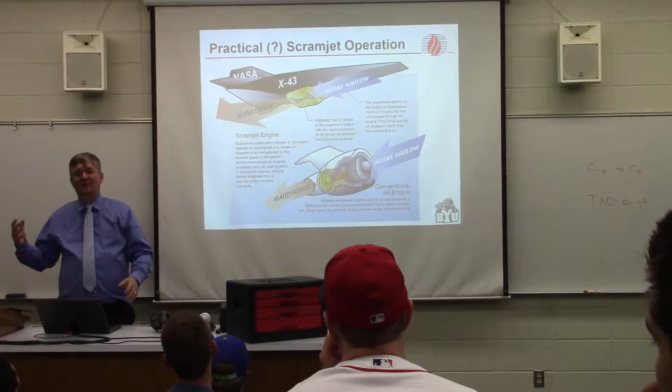The way they work is basically about the size of this room. It's just a big wedge, and underneath it is this engine. This is a scramjet, and they're introducing hydrogen in this engine, but they can't get the hydrogen all the way through. So this is what it looks like underneath. The gas is coming in through here, and they introduce the hydrogen here. But in reality, only about half of that hydrogen, or maybe a fourth of it, actually burns.

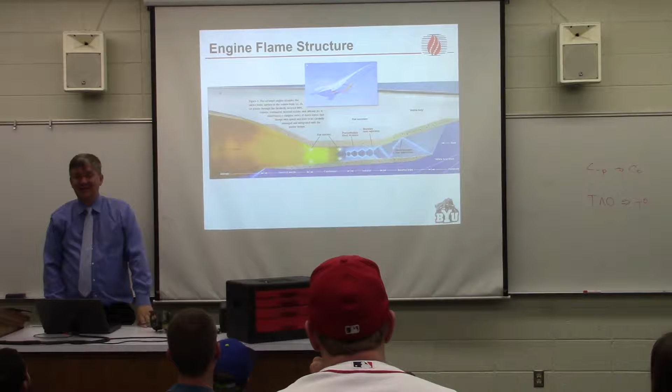Trying to keep this thing in flight is a major challenge, but they have accomplished some pretty significant things. This is what it looks like in flight. So it's flown at Mach 7 and 10 in 2004, and it's capable of getting up to about Mach 17 if they can get the system to work right.

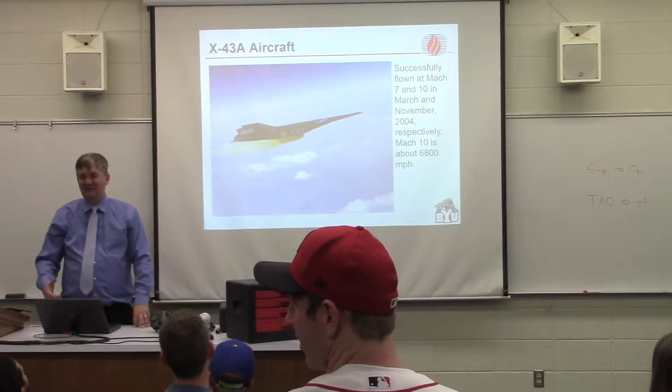So they're working along - this is part of what they think will be a space plane. You can get it up at a high enough velocity in the atmosphere that they can actually coast it into space, and at least in theory it will be a lot cheaper when you get to space than just the heavy lift rockets that we go through.

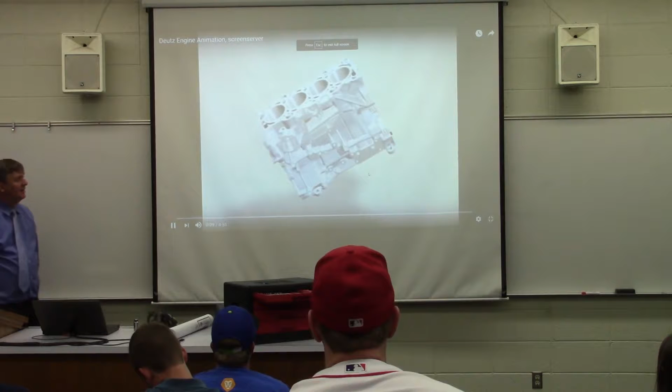I wanted to look at this. This shows an engine being put together. This is a Deutz engine, but it's really cool. So that's called the block, and that's the biggest, heaviest part of the engine.

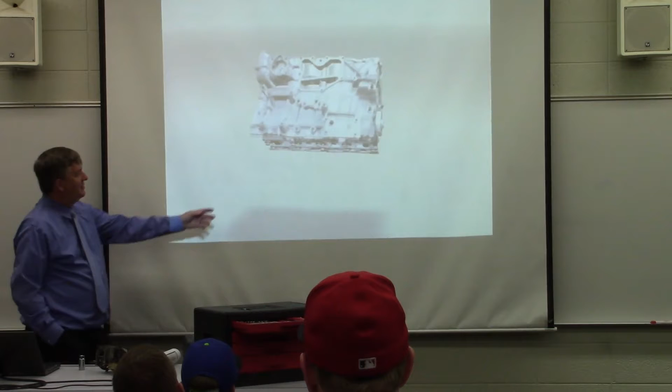That's the crankshaft for, in this case, a 4-cylinder engine. Coming onto those are the bearings, the connector rods, the pistons. The pistons are getting put on with their bearings. So there's the 4 pistons going into the 4 cylinders. They're in the block, and then this is the bearing for the crankshaft, and a few miscellaneous components.

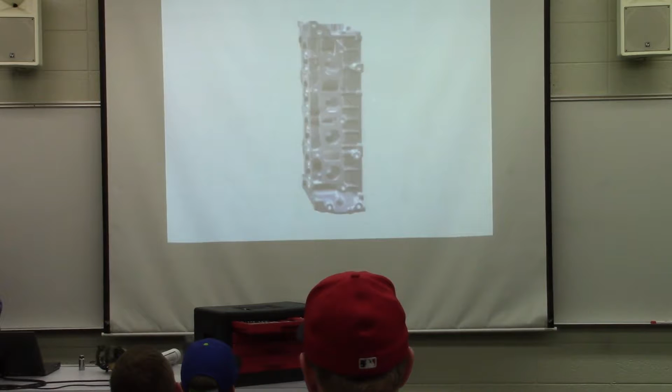That's actually the timing wheel, that goes on here, and this is the header. So this is what sits on top of the block where the valves and all of those things are. So that goes on, so first you have to load it up. There's the valves. Those are the fuel valves and the exhaust valves coming in.

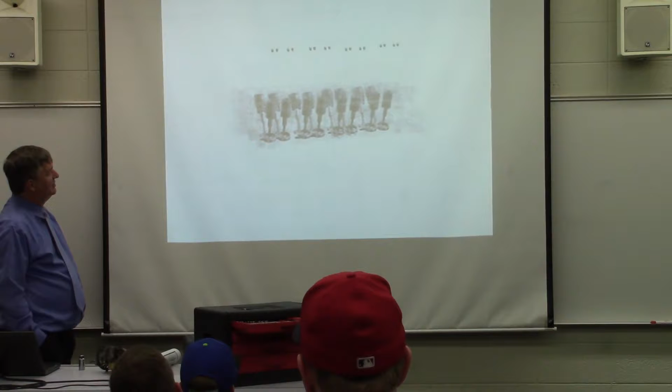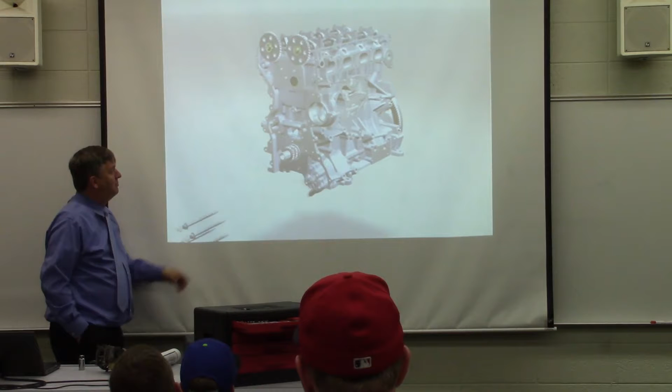So the valves are all installed. Valve covers, and then these are the camshafts that came up on the top of there. The camshafts get bolted down. You just saw that gasket come on. That's the head gasket that we talked about. And so the header gets bolted to the block. The head gaskets between those.

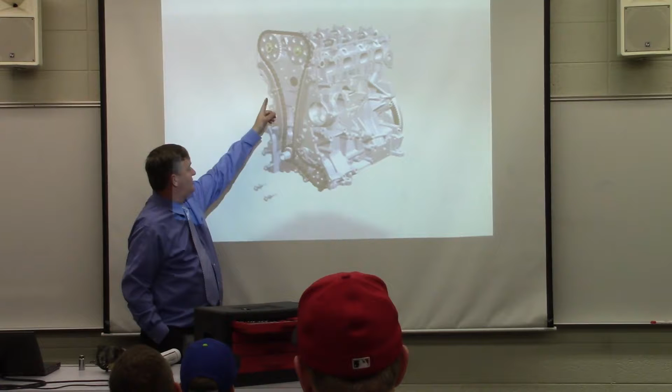And now come things like the water pump. Oh, the timing chain. Remind me to talk about that, that was the timing chain, that long one. That's important for you to understand as well.

And just some covers for those things. This is called the tappet cover. That goes over the very top. It also has a gasket, way less expensive gasket because there's no pressure in there to speak of. It just covers the top of the engine.

And this is the oil pan that goes on the bottom. Inside the oil pan is the oil pump. So you see them installing the oil pump there. And then that sits on the very bottom of the engine where the oil goes, and that gets bolted onto the bottom.

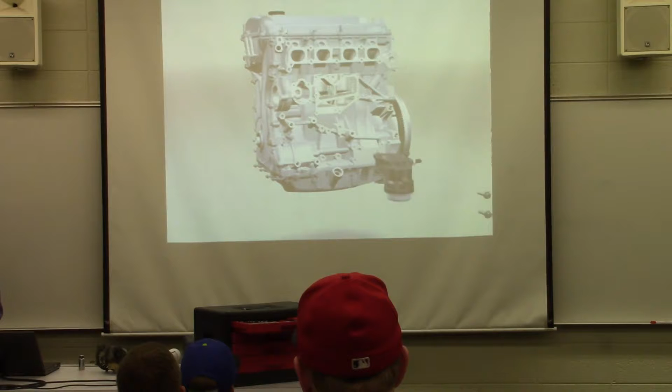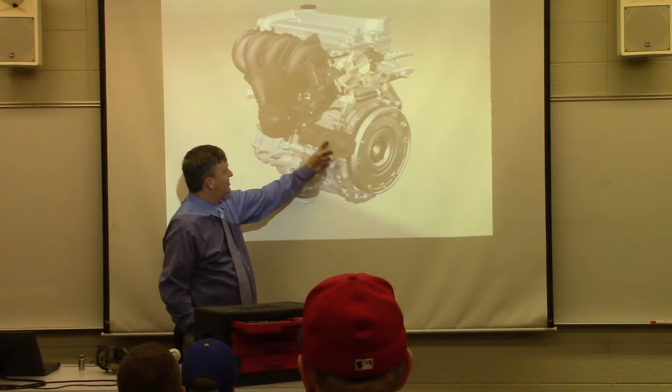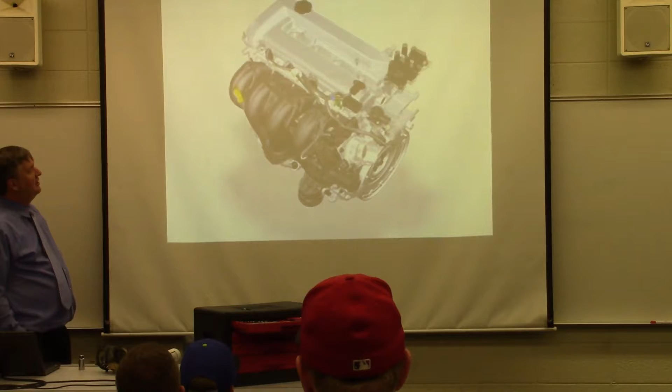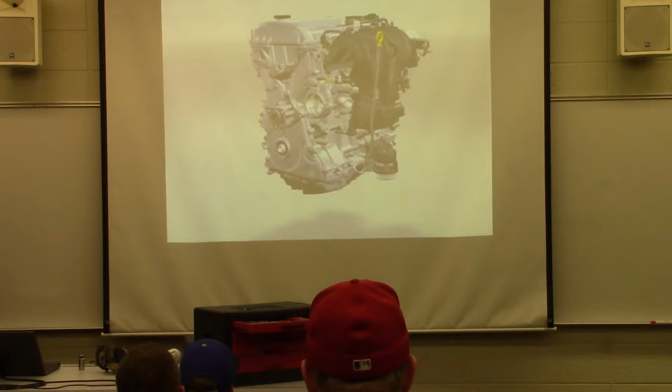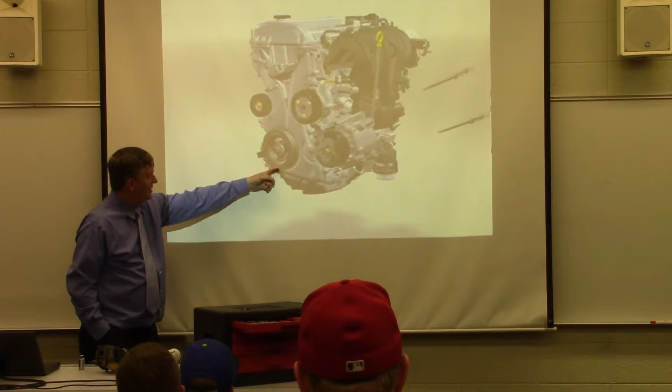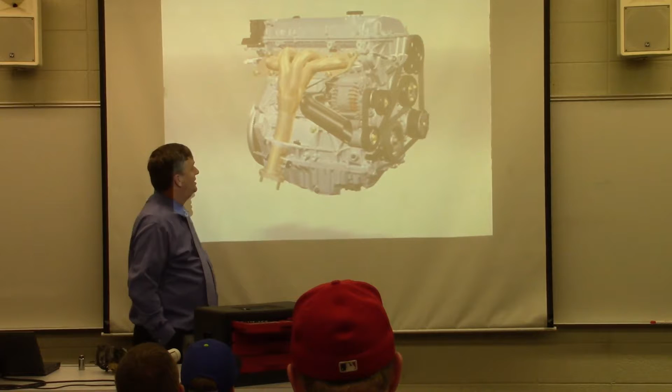Another idler arm, and then, oh, there's the alternator. The other one must have been the power steering. And then the fan belt, or serpentine belt is what they really call it these days, exhaust manifold, and you've got the engine built, just that fast. It takes a lot longer, it does.

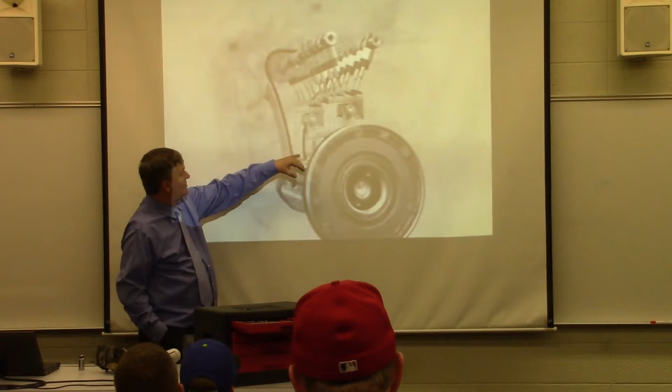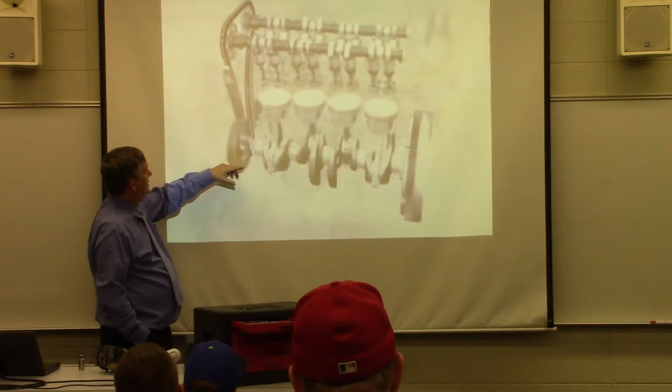So this is how it's working. So you can see all of the things we talked about working, and I'll actually show in some illustration here the dynamics of how this works. So the piston's coming up. I'll focus in on one of these pistons here in just a minute. So slow it down and watch us. I'll just watch how it's working.

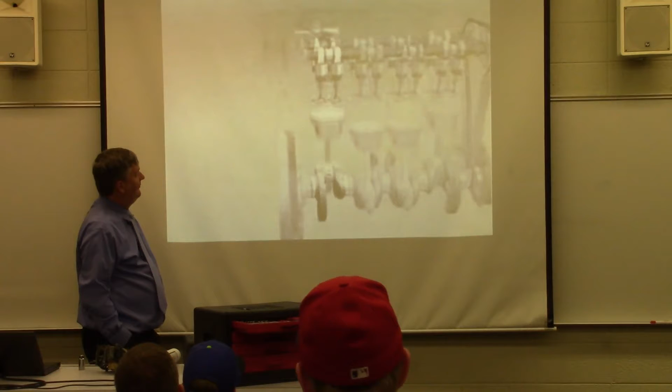All right, so here's just one individual piston. This is the diagram, like the diagram we saw. So the fuel injector injects the fuel on the back of the valve, then the valve opens, pulls the air in, the air just got pulled in, gets compressed, spark goes off, pushes it down.

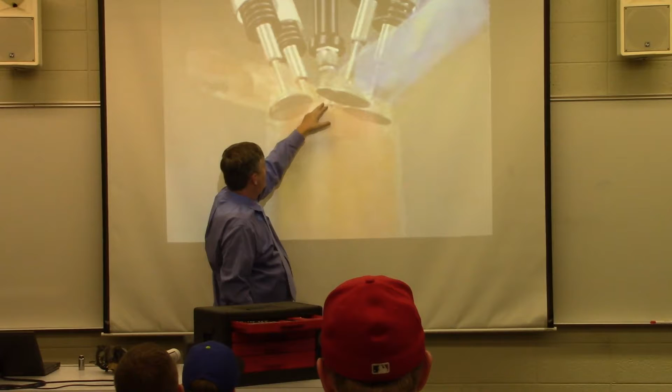And this is, you've probably heard of dual valve engines. So this is a dual valve engine, meaning you have two valves on both sides, because getting the air in and out of an engine is actually one of the major parts of the inefficiency of the engine. So getting as much valve area as you can in and out of the engine helps the efficiency fairly significantly. So now you see the cams operating at the top, and so you can watch them opening and closing the valves.

So this is an overhead cam engine. We have several of those out in my truck. The cams, in overhead valve and overhead cam engines, are above the valve. In lawnmower engines, the cam is usually down here, and the valves are on the side of the piston, and they open and close on the side instead of at the top. The fuel has to come up and scoot across the top and into the cylinder. So you'll see a lot of gasoline engines with that. I thought that was a fairly good illustration of how this all comes together.

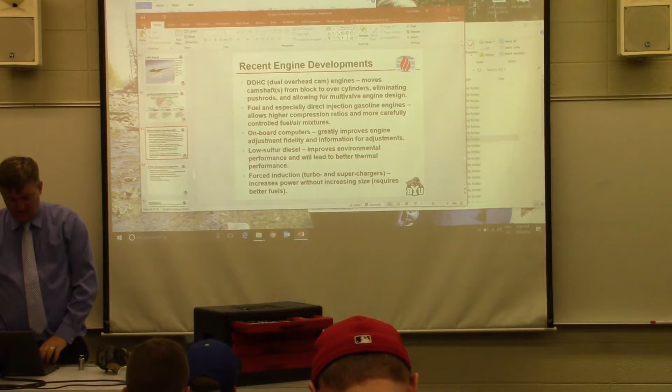All right, last thing, five minutes. Let me just go quickly through some tools. I found some pretty good things that I wanted to review. This actually comes out of the handbook.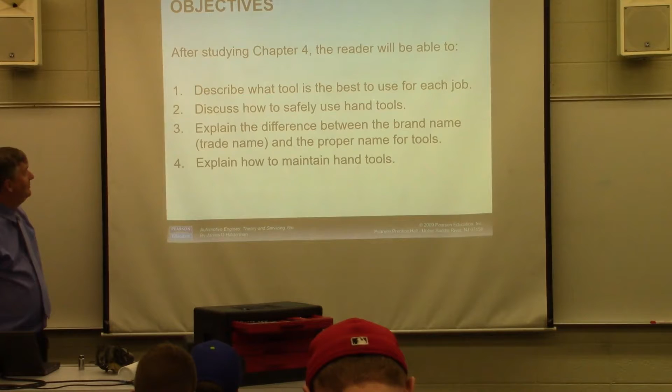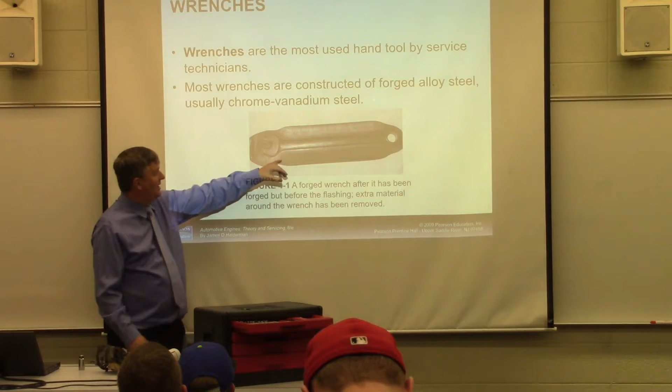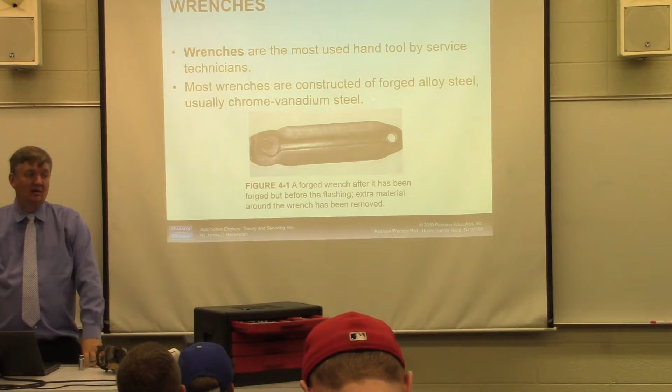So these are wrenches. The way wrenches are built is they're usually forged, which means you have a mold that you pour molten metal into, and this is what the wrench looks like. Then somebody comes by and grinds off all this excess material and actually forms the wrench. The reason they're formed this way is it'd actually be stronger if you were to cut them out, but they're just way easier to make this way.

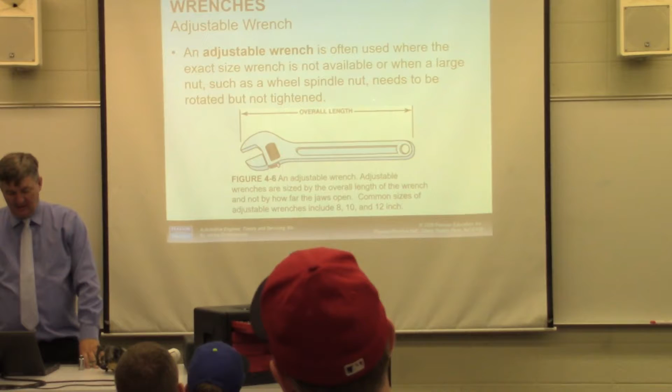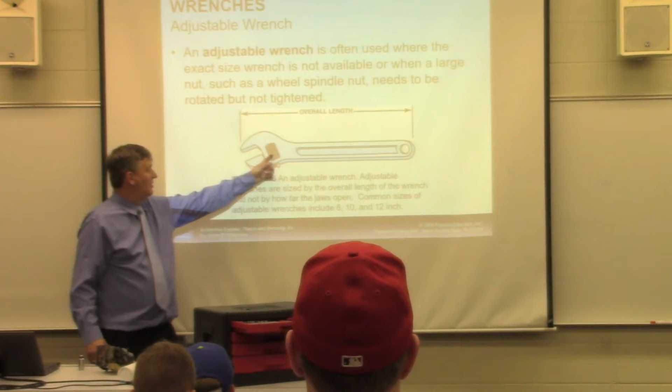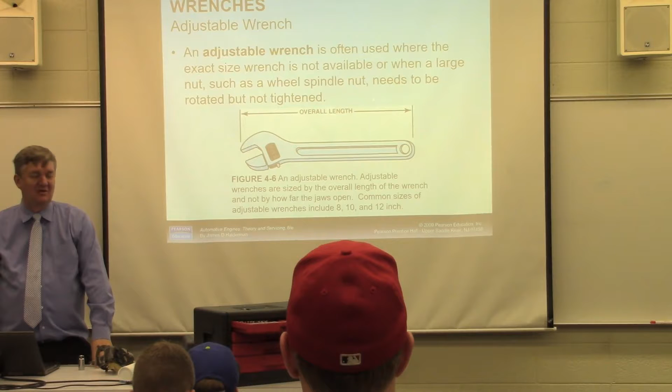We talked about open and box end wrenches. I think I posted this. I forgot to talk about the adjustable wrench. This is frequently called the crescent wrench, but Crescent is a brand name, not a description. With an adjustable wrench, you just turn this knob. This one wrench can play the role of a whole bunch of wrenches, and they're actually pretty good unless you have to do something requiring more force. They're not really good if you're really tugging on them hard, but they're really helpful for not having to have a whole bunch of wrenches in hand.

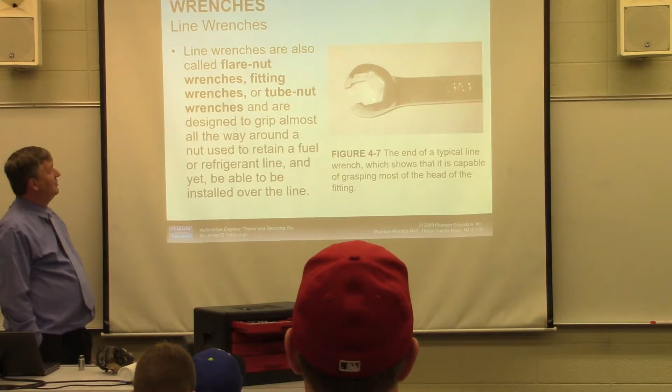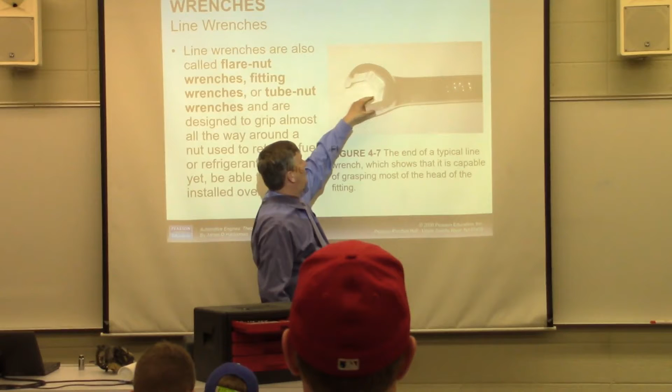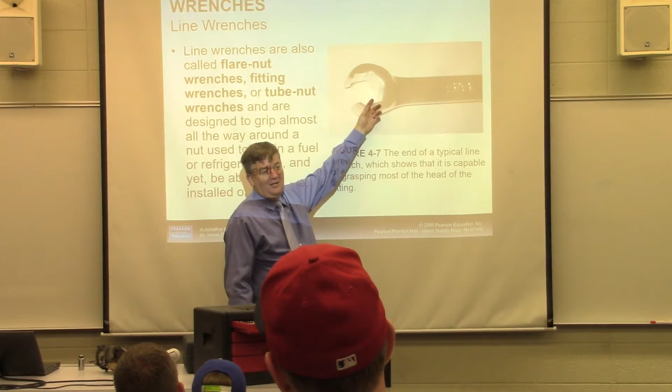So flare nut wrenches or line wrenches are used frequently on fuel lines, on engines, and other pressure fittings. Their main advantage is they go almost all the way around the nut, but you can still slip them over the fuel line, and then set it over the nut. Because those are high pressure systems, the torque on those is sometimes very high, and an open end wrench runs the chance of stripping the edges off. This is almost as good as a box end wrench, except a box end wrench couldn't get over the fuel line. So this lets you get over the fuel line and use a box end wrench type of a thing.

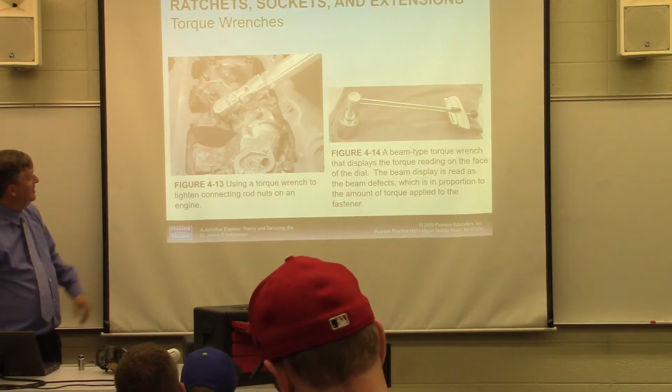So ratchets and sockets and breaker bars - we talked about the sizes and types and number of points. This is a torque wrench being used to torque down, in this case, the bearing bolts on the crankshaft. Torque wrenches, by the way, need to be calibrated routinely. So there's deep socket and regular socket ones.

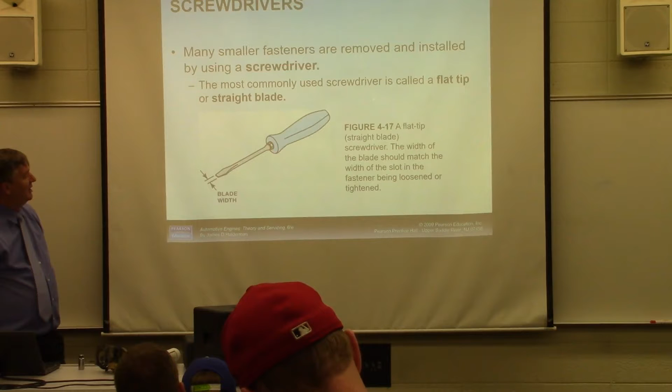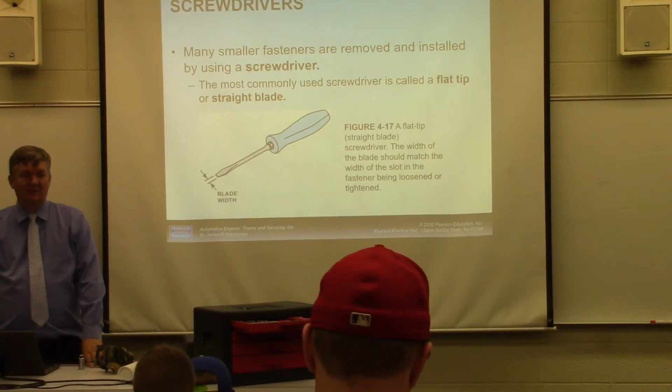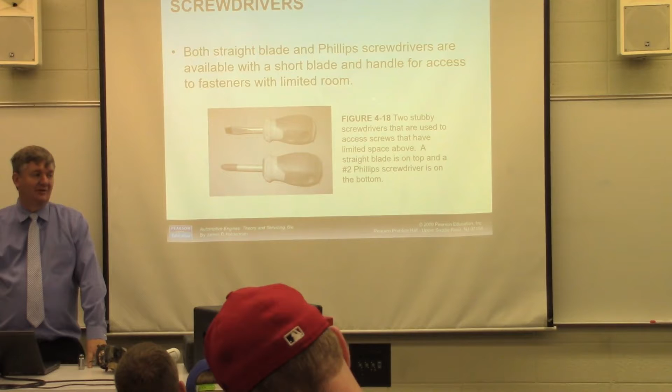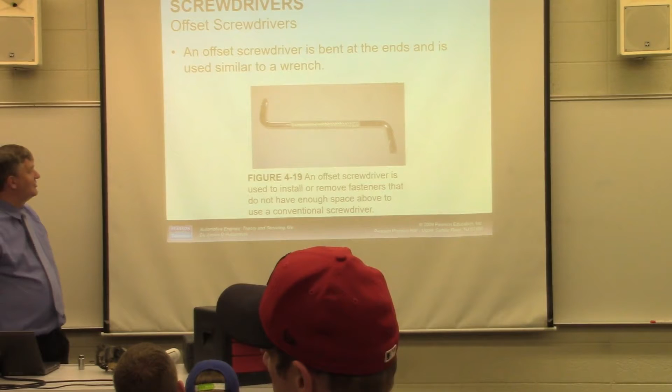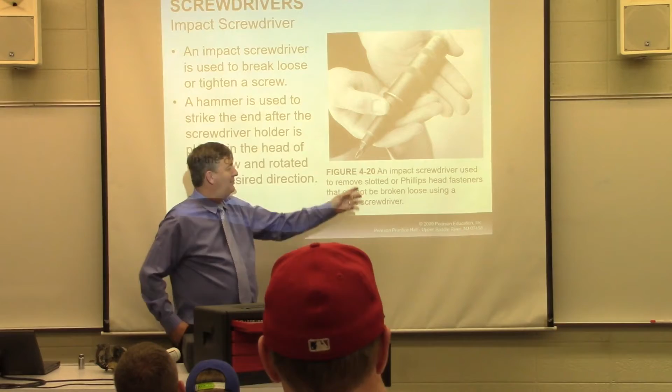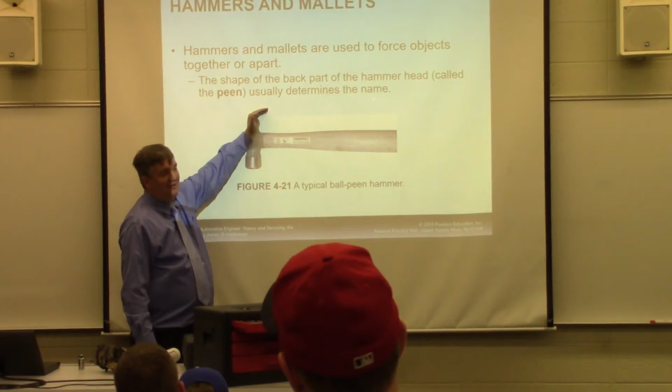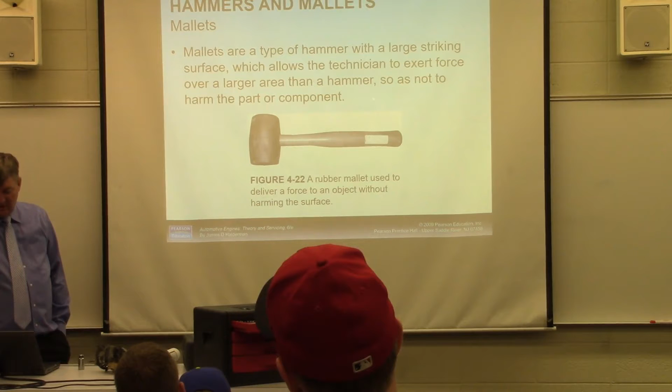Sometimes screws can be really stubborn, so they actually make an impact driver. You put a screwdriver on here, you hit it with a hammer. It's built to be hit with a hammer, and it turns that into a lot of torque that can drive a screw off. There are different kinds of hammers - there's a ball peen hammer. More commonly, you'll have either a framing hammer, which looks like this, with relatively straight claws, sometimes called a straight claw hammer, or a curved claw hammer, a finishing hammer, which has a lot more curvature, usually smaller weight. Others have a kind of waffle stamp. These are mallets that get used usually when you're frustrated and getting a little desperate - better than a hammer, but still not great.

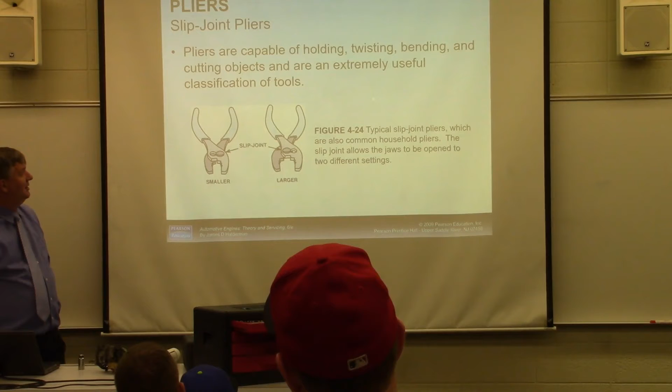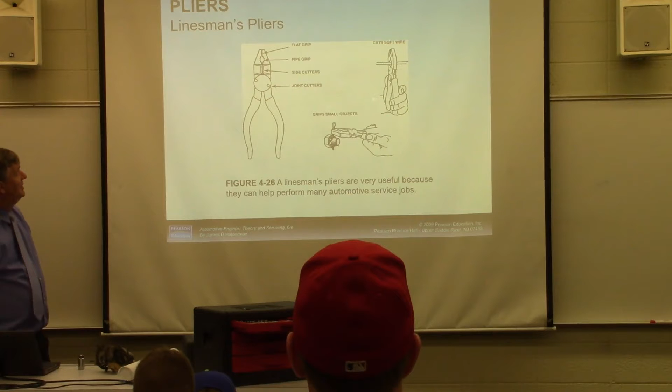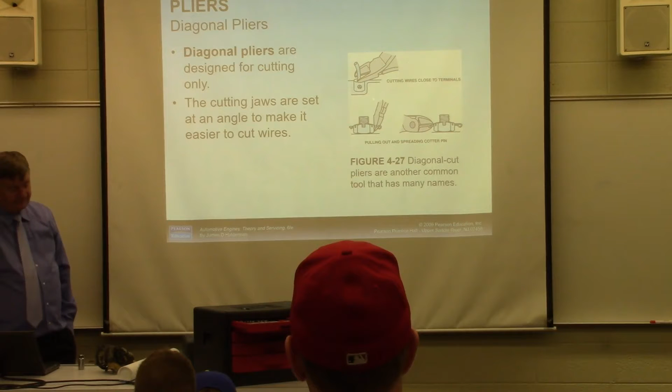Diagonal pliers, or just wire cutters, is what some people call these. You probably won't have these, although they're not common on engines, so I don't think they're on the ones you're taking apart.

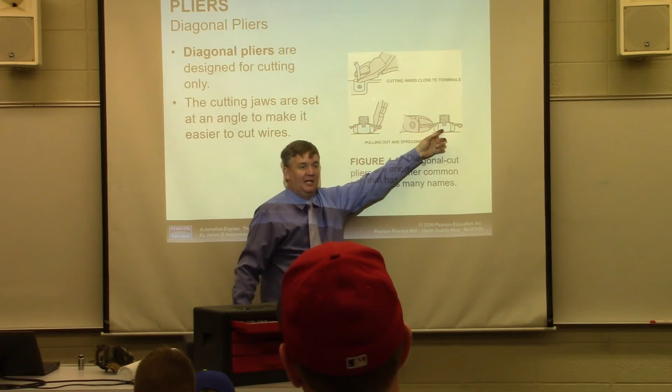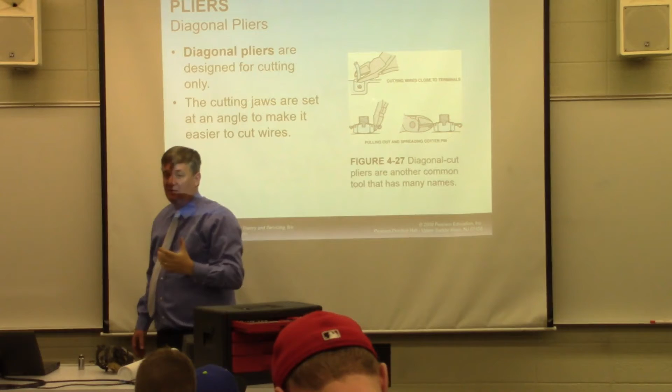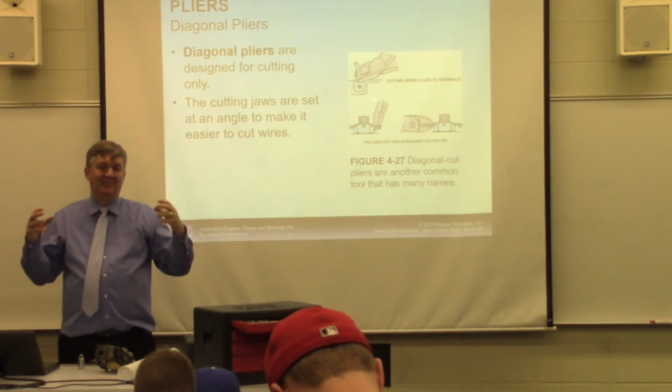We have a cotter pin that goes right through the bolt, and this nut has slots in it. You line these up and put pins through there, and that's to make sure that nut can never come loose. The pin holds it tight. You always have those on the wheels, not your tires, but the wheels that hold the hubs on. So always have cotter pins in them, or at other critical places where something working loose would be catastrophic.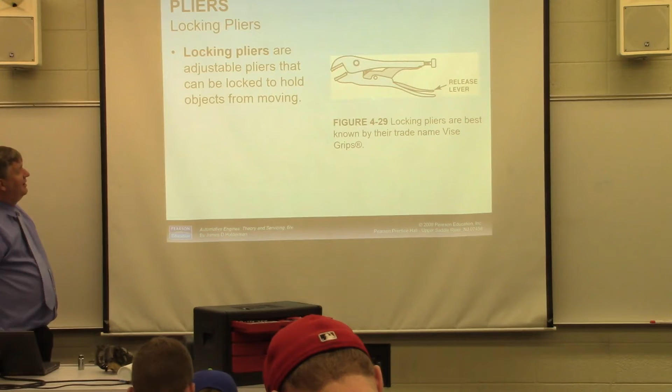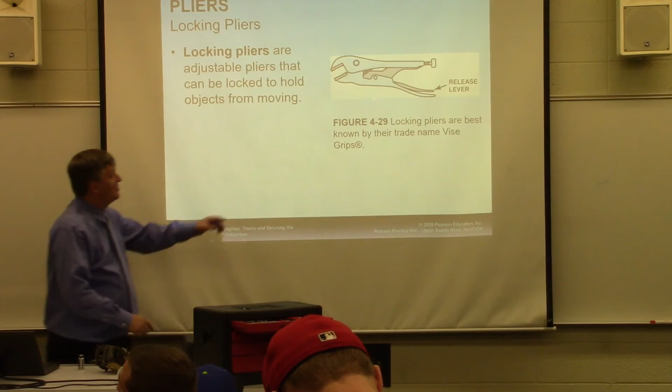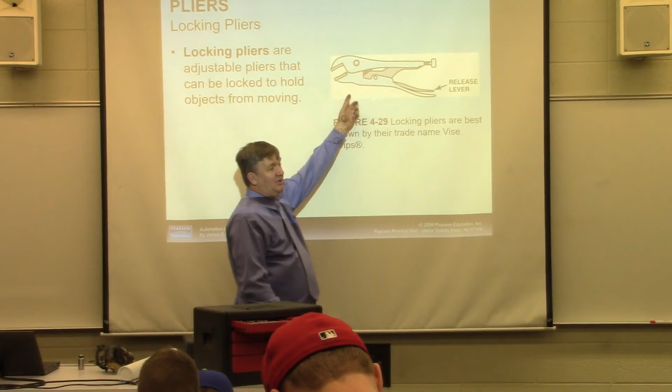Needle nose pliers, locking pliers - these are also frequently called Vise Grips. That's a brand name again, but that's what almost everybody calls them. You adjust some tension in here, then squeeze it down, and it locks onto the nut. These are usually used after you've stripped a nut or a bolt and can't get a hold of it with a regular wrench anymore. You can sometimes get a hold of it with this. If that doesn't work, there are other more desperate measures, just to show.

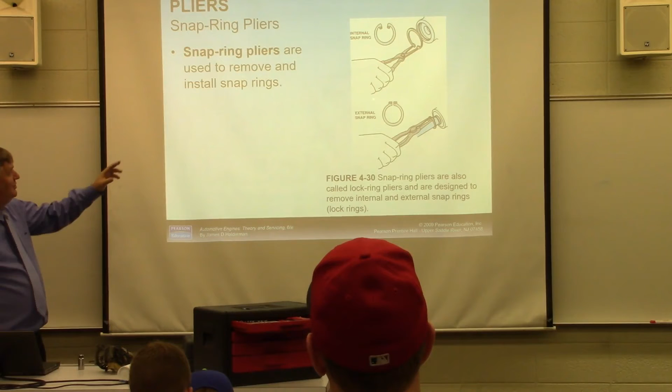This is how you get rings on and off - an internal ring or an external ring. The rings on your engine come off; they actually have a different tool for those.

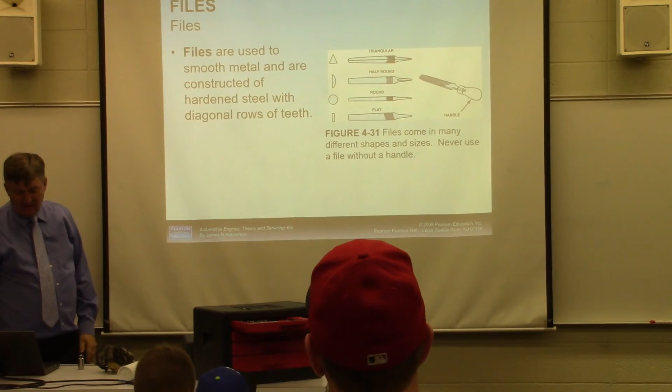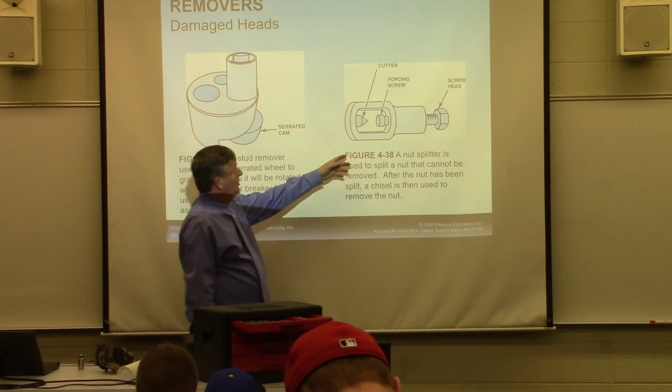Files, tin snips, utility knife - just to show you some of these desperation tools. So things go really bad, you can't get a nut off of a bolt, and you finally just say, I'm going to sacrifice the nut.

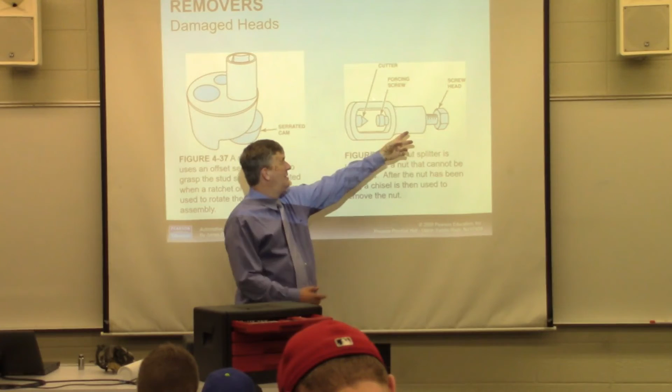So you put this nut splitter on there, put the nut right here, screw this down, and it actually fractures the nut. You have to take it off in pieces, and now it comes off. Usually, if you're at that point, you've done something badly wrong.

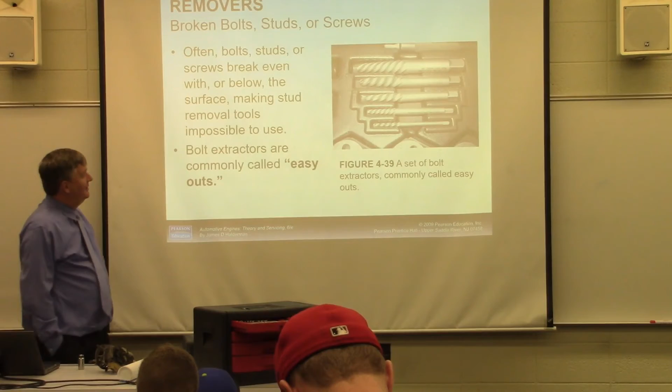Similarly with bolts - what happens if you can't get the bolt out? You actually drill a hole in the back of the bolt and use what is usually called technically an extractor, but the brand name is Easy Out. Almost everybody calls them an Easy Out. If you look at this, you can see if I rotate it in the direction that it gets tighter, it's actually in the direction that's going to pull the bolt out.

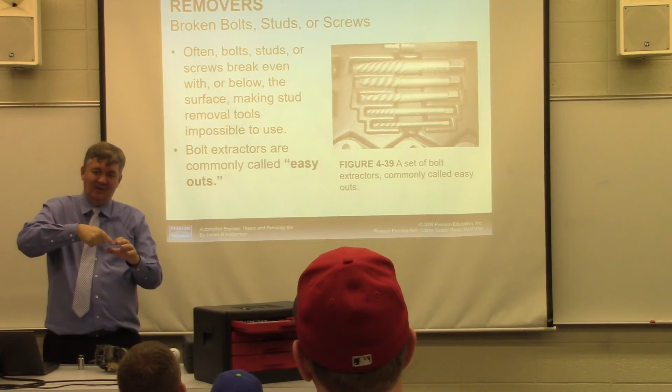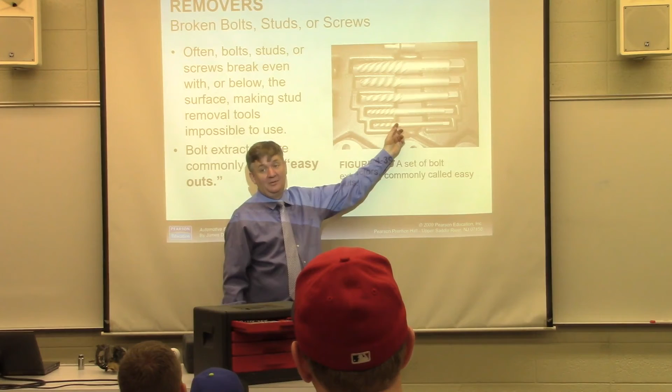As that drills into the bolt, you rotate it this way into the bolt, and that's going to extract the bolt so you get a good grip on it. My experience is that these are supposed to be multi-use tools, but frequently end up broken, because they're really hard steel - they have to be to drive that bolt out. So they're fairly brittle because they're so hard. I've got a bunch of them that are broken off.

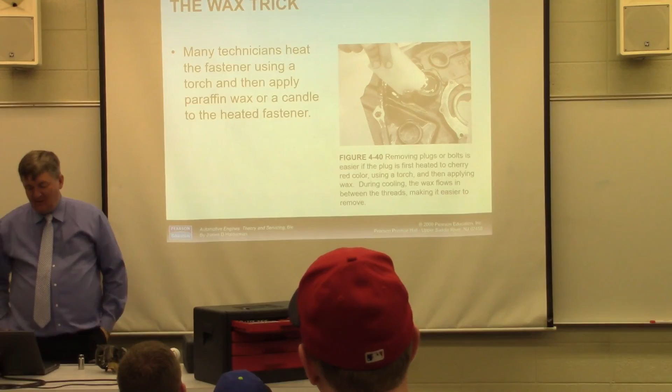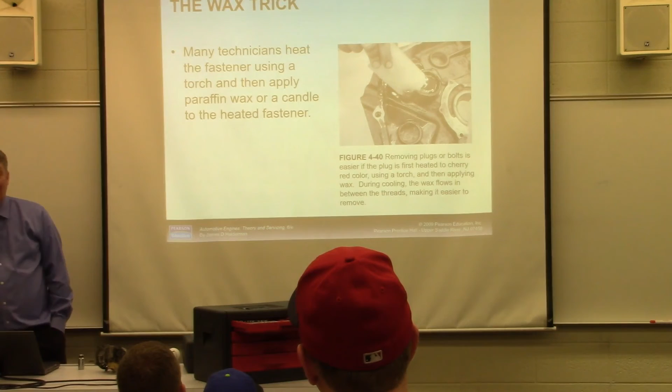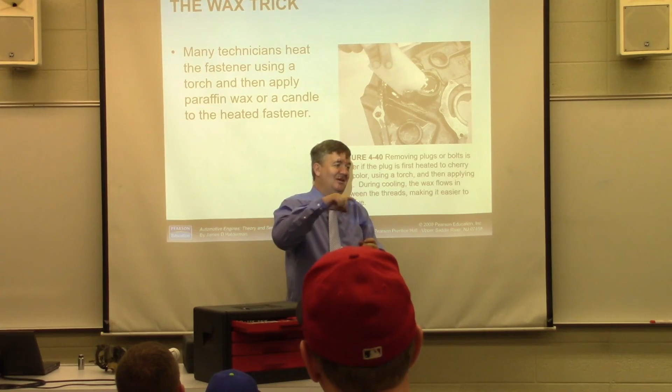Finally, this is the wax trick, and then we'll end here. Trying to get a bolt off, one way you can do it if nothing else works is you take a torch to it and heat it up red hot, then take a candle while it's red hot and melt the candle on it. As it cools down, it shrinks and opens up a little bit of a gap, and the wax flows down into that gap and lubricates it a little bit so you can try to back it off.

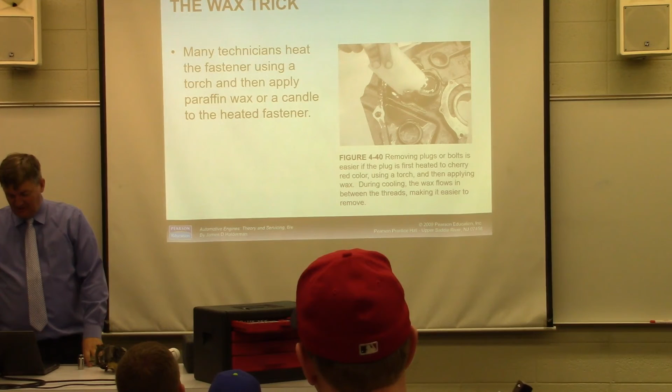That's like WD-40 on steroids. Usually by the time I get to this point, I've given up and I'm taking it to a real mechanic, but I've seen real mechanics do this same thing. So those are some things about that - any questions about any of that?